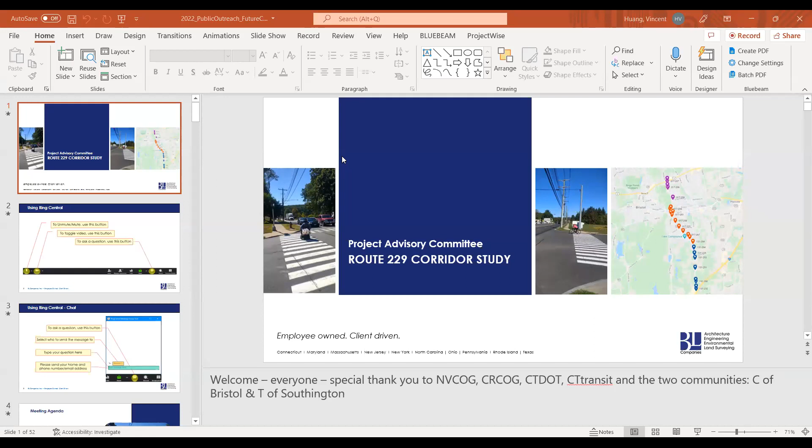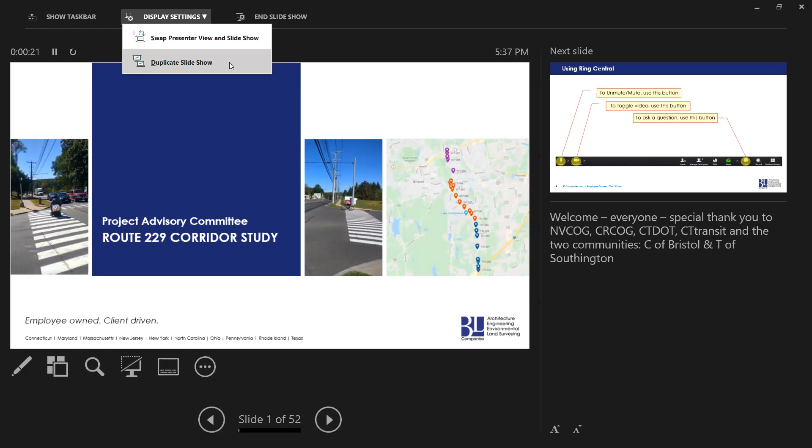Okay. Sorry, screen share wasn't working. That's fine, I can do without comments, so just share my plain old screen. They're probably seeing this instead of that. Oh, screen 2, that's why. You want to duplicate the screen that you have. Duplicate slide view. Why is it empty? It's loading. There we go, we're good. You have the other one, right? Yes. Thank you so much.

Thank you for waiting. We had some technical difficulties, but please note that we are doing this as a hybrid version where we have you in person as well as people online. So everyone gets to listen and view exactly the same presentation at the same time. My apologies, first we had some internet signal issues, and now we're up and running.

For those that are online, please note that you have on the left-hand side a mute and a video button to turn your camera on and off, as well as a chat box where you can communicate with the presenters and ask a question, which will be answered after the presentation. During the presentation, we do mute you so we can have a continuous presentation, but for those of you who are in person, please do stop me at any point and I'll answer your questions. It's easier to do that with individuals here versus online.

And I have Vincent here to assist me if there are any questions necessary to answer right away online, as well as Rich Donovan, who's the project manager from NVCOG, who couldn't be present with us, and he's also answering questions online. And we have Kevin, and Kevin is from NVCOG and will assist us as well.

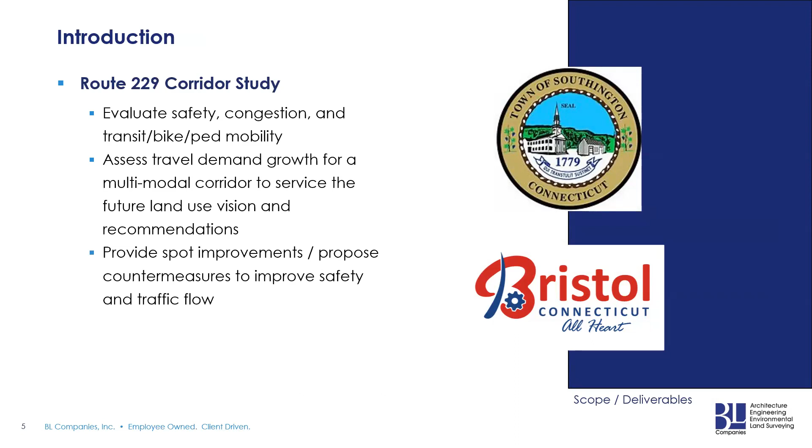So the project itself has been divided into 3 segments, the same way as the presentation. The northern segment stretches from, actually I should have a button, let's see.

Nope, I don't have it.

If you can see my mouse, the project stretches from Farmington Avenue to Broad Street for the northern segment. The central segment stretches between Broad Street and ESPN Drive, or the town line. And the southern segment is from the Southington town line all the way to the I-84 ramps.

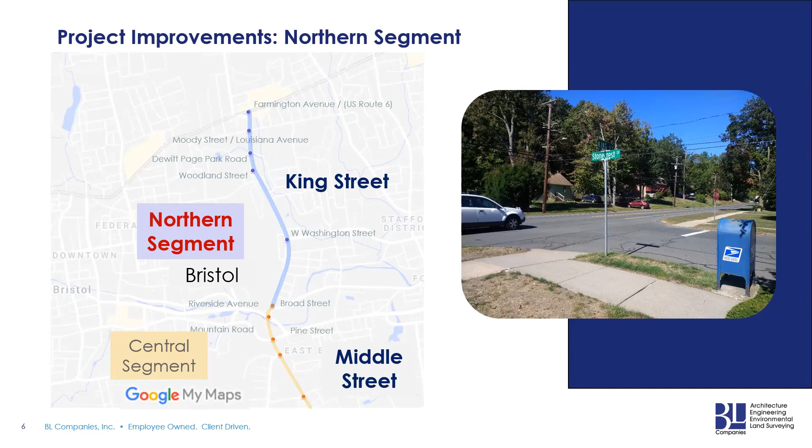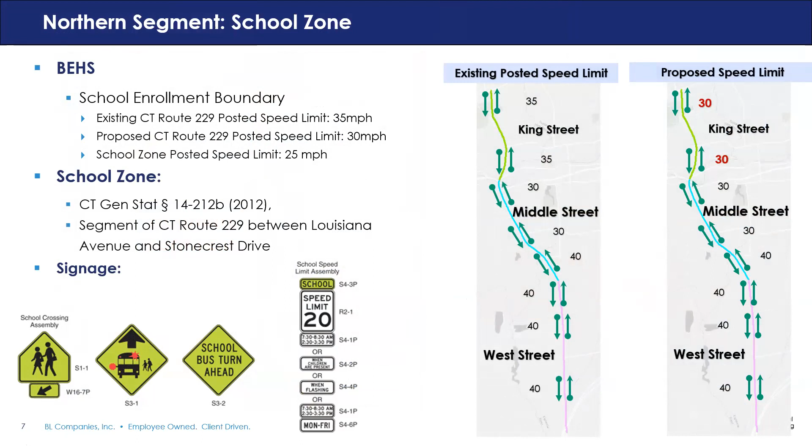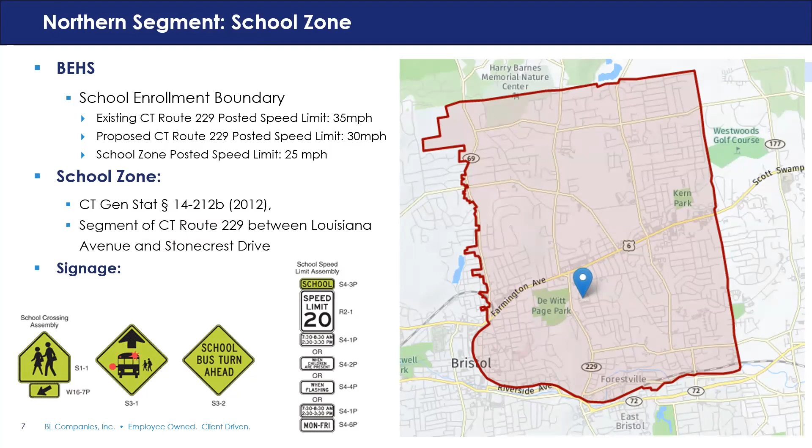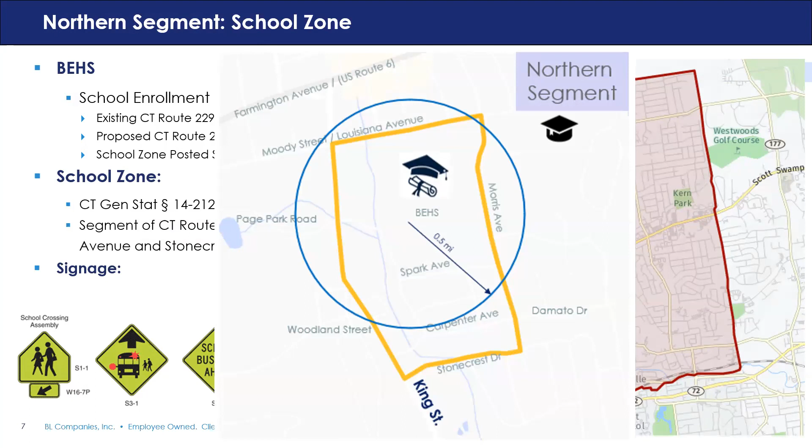Looking at the northern segment, we looked at some safety concerns. One of the locations we identified is where we're proposing a school zone. To your right, you'll see an outline of the enrollment boundary, and what we're proposing is that within a half mile of the school, we define a school zone. That means lowering the posted speed limit from the current 35 to 30, and during school hours to 25 miles per hour.

Overall, we have done renderings for 13 locations. For this presentation, just to make it shorter, I've selected a few locations, but we have printouts of all of them, and I can always pull those out. This is just one of the locations we found to be important.

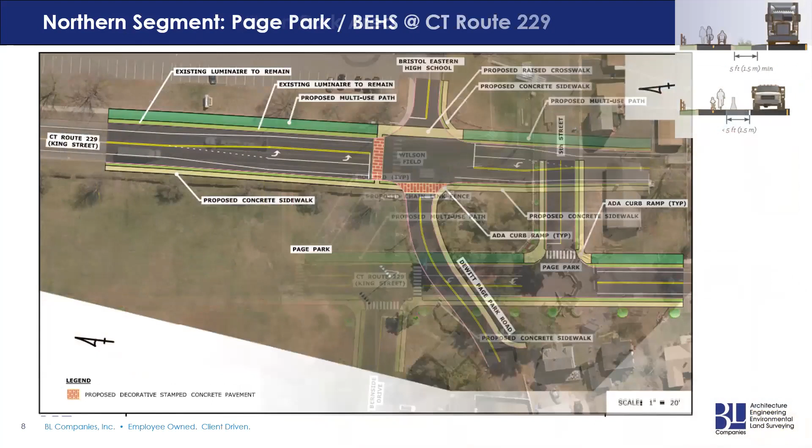How come I can't hide this? Nope, it's not going away. I just don't know why the title isn't... there we go.

Sorry again. So this intersection is with Bristol Eastern High School and Page Park. We felt this location is important as it serves the community and most vulnerable users. Due to high crash rates, such as rear ends and angle side swipes, we're proposing to widen the roadway within the existing curb cut to provide exclusive left turn lanes. We're also proposing a sidewalk on the west side that extends into Page Park - this is the sidewalk, shown as the yellow line. The sidewalk will cross a culvert, which could be a nice structural feature in the park itself. On the other side of the roadway, we're proposing a multi-use trail on the east side, which will connect to the existing and proposed sidewalk along the way.

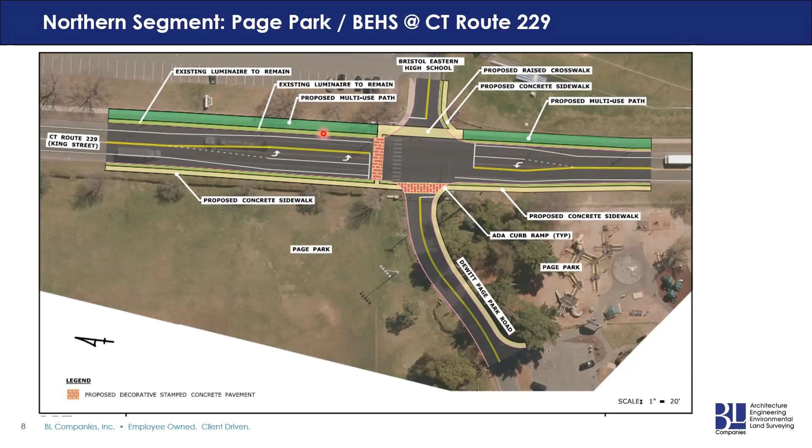Another location we looked at in the northern segment is this particular area, which has a very limited right-of-way for the multi-use path. A few considerations were made in our design process. One was to provide a physical barrier between cars and vulnerable users, narrowing the path from 10 feet wide to 7 feet wide, and providing some sort of barrier. This could be either a jersey barrier or bollards with chain, or some sort of physical delineation between vehicles on the roadway and the multi-use path.

In this area, we're also proposing utilizing rectangular rapid flashing beacons, which are pedestrian-actuated and used to improve safety at uncontrolled marked crosswalks. The device includes two rectangular-shaped yellow indicators, each with an LED array light source that flashes with high frequency when activated. The roadway design for vehicles includes left turn pockets to accommodate the unsignalized side roads.

Question: I see you have one ADA curb ramp, but will they all be? Yes, thank you, because we've had a constituent ask - this is actually the particular reason we selected this slide, this is the only stretch on the northern segment where you don't have a sidewalk; everywhere else you have a sidewalk in some shape or fashion on one side of the road. Can you repeat the question for those online? Sure - will the curb cuts have ADA accessible ramps? So the question was, will the sidewalks have curb cuts for ADA, will they be ADA accessible? And yes, they will be. That's actually going to be one of the slides - we did a summary of all ramps that are ADA compliant and non-compliant, and how many we need to replace throughout the corridor.

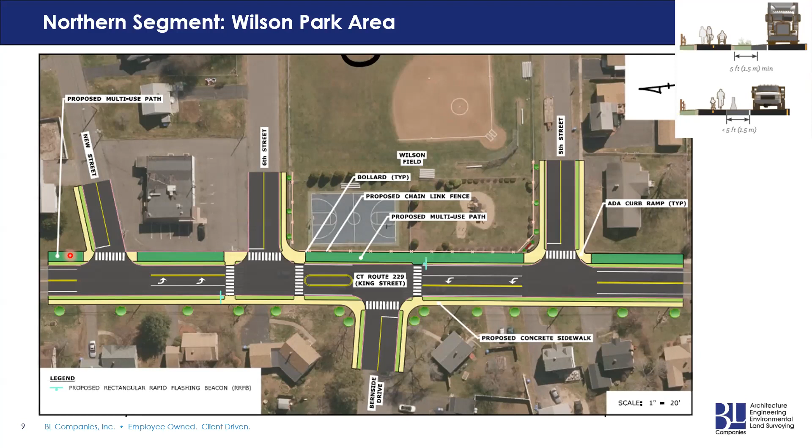We suggest keeping the information to a minimum and at key locations. The sign proposed will be visible by all modes: drivers, pedestrians, as well as cyclists. The information can be branded by the community for the corridor itself, or left unique. Samples of some of the wayfinding or gateway signs are such as ESPN, industrial park. We can design anything for this project or location.

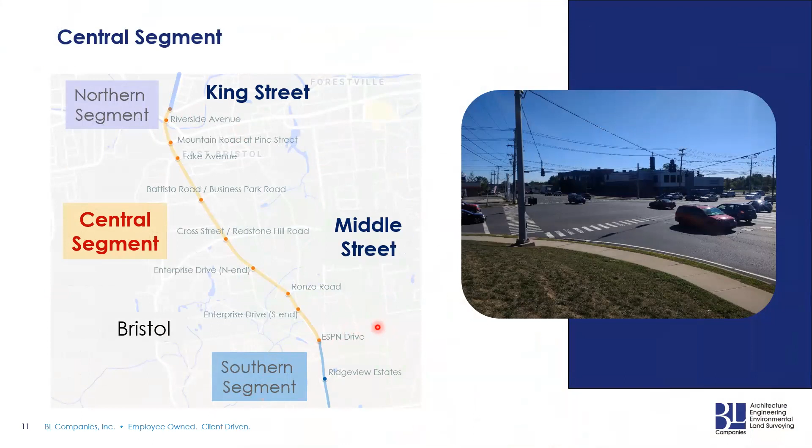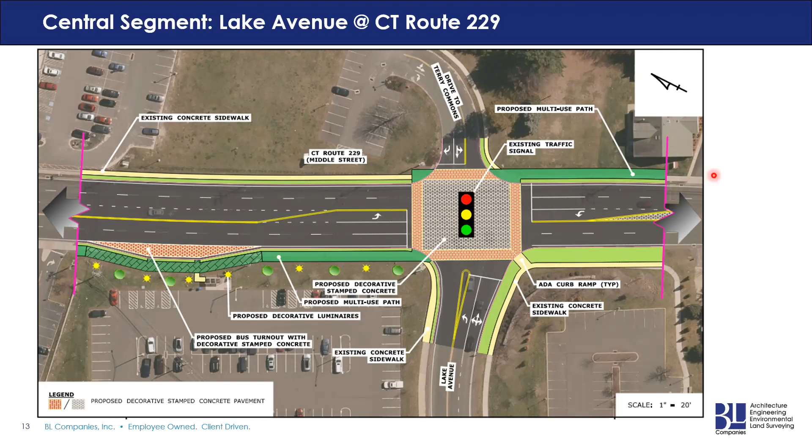The key to the southern segment—again, the southern segment is from ESPN Drive to the I-84 ramps—is that the improvement was to widen the southbound movement to 2 through lanes. That starts just south of ESPN Drive, all the way to I-84, or more specifically to Executive Boulevard North. Additional turn lanes might be provided at locations where warranted due to proposed increased volumes or high growth and proposed developments. And as I mentioned, we're continuing that multi-use trail on the east side and sidewalk on the west side.

There will be a sidewalk. Sidewalk is always provided—here's your north, so west side, east side, yes, sorry.

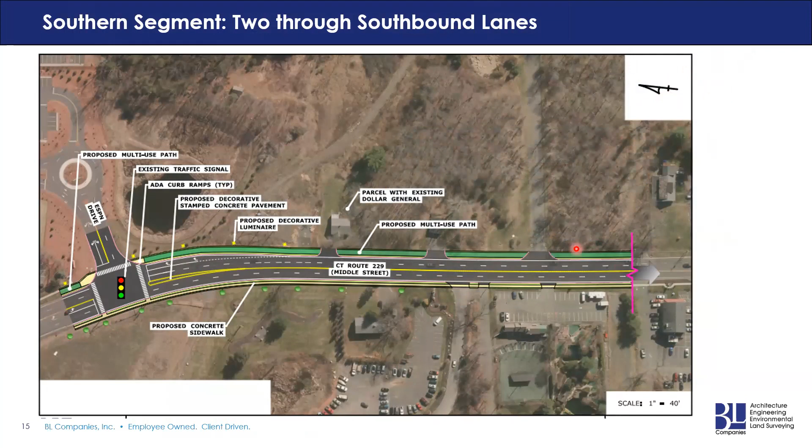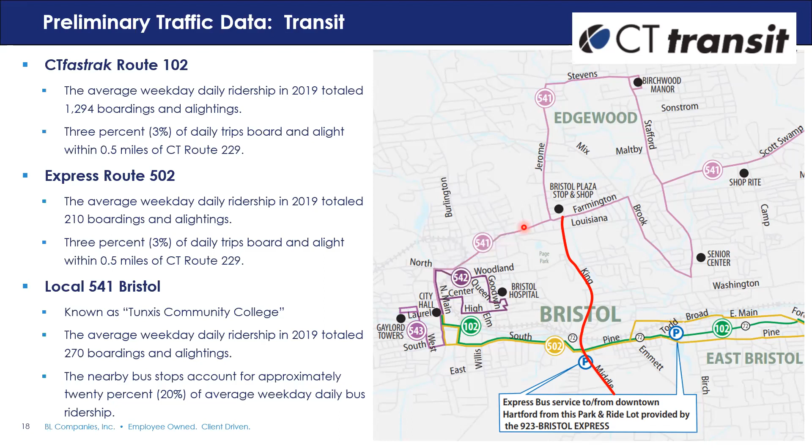Next, let's talk about overall multimodal accommodations, starting with transit. Based on existing conditions, currently there are a few bus routes that bisect our corridor, but none that are traveling in the corridor itself. The bus routes include CTfastrak 102, which travels on Route 72, Express Bus Route 502, which travels pretty much the same way as 102 with fewer stops, and local bus route 541, which travels on Farmington Avenue.

When proposing a new transit route, a transit index need should be created or reviewed. For this particular study, we utilized the 2018 comprehensive transit study done for CRCOG. That study provided us with information on the transit index need, which is based on socioeconomic information, existing public transit availability, ridership stats by stop, access to the stops, walking distance, locations, and so forth.

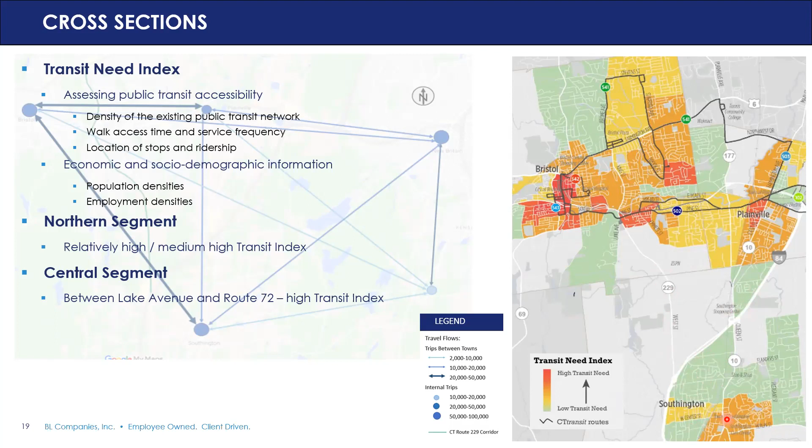So we've discussed and determined that there's a need for a bus route along 229. Similar to the 2018 comprehensive study, we've developed a bus route. We proposed the bus route to utilize the Route 72 extension and Riverside Avenue.

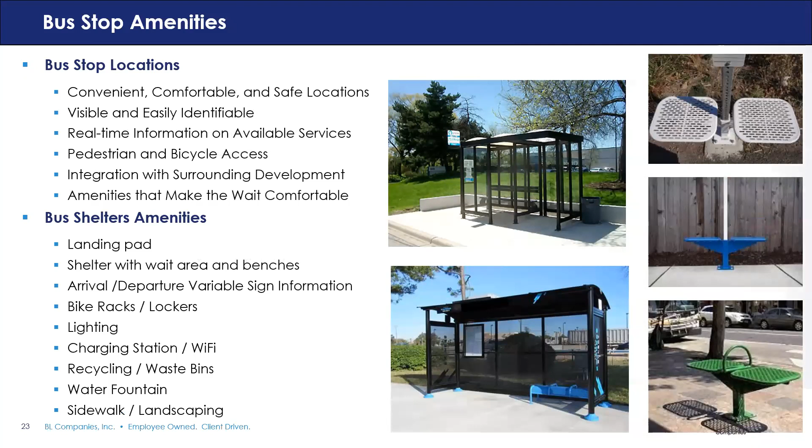Now through the presentation, we've talked about the pedestrian and bike accommodations with continuous sidewalk and the multi-trail. But what we did not talk about enough is that both sidewalks and multi-trail must adhere to ADA and PROWAG compliance. That means we need to ensure that all intersections provide handicap ramps, pedestrian push buttons at all crossings, signalized intersections, and proper crosswalks where necessary.

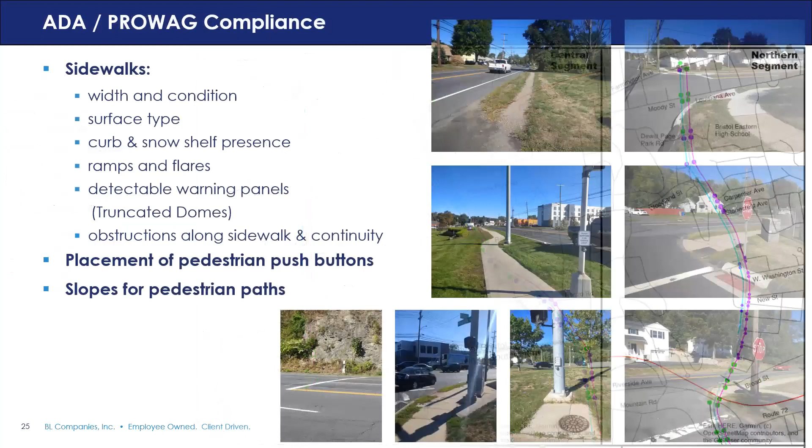And these are just images from the corridor where we're lacking these, or they're not up to standard. So this is just a quick map of proposed multi-use trail, sidewalk where it's lacking, as well as the proposed handicap ramps. It's just quick dots and lines to show an overview of where we would fill those in.

This map provides proposed locations of crosswalks at all intersections, signalized and unsignalized, and the locations where we need to add pedestrian push buttons at signalized intersections.

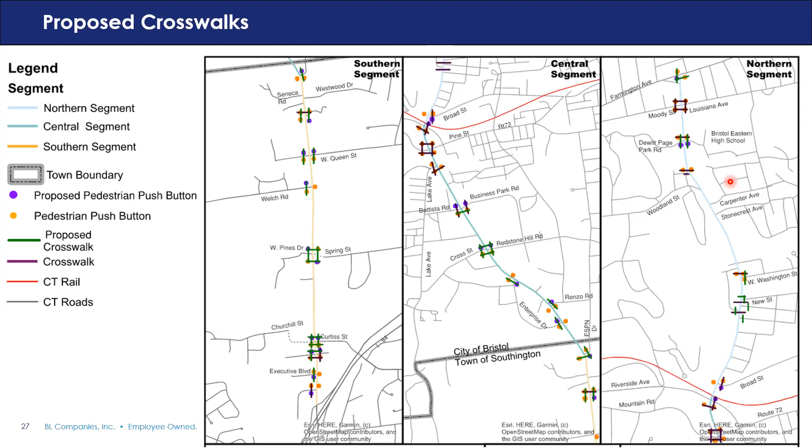So here's a quick summary or statistic table where overall we will need to provide 37 crosswalks that need to be striped, 75 ramps that need to be installed, and 49 crosswalk push buttons at already existing signalized intersections.

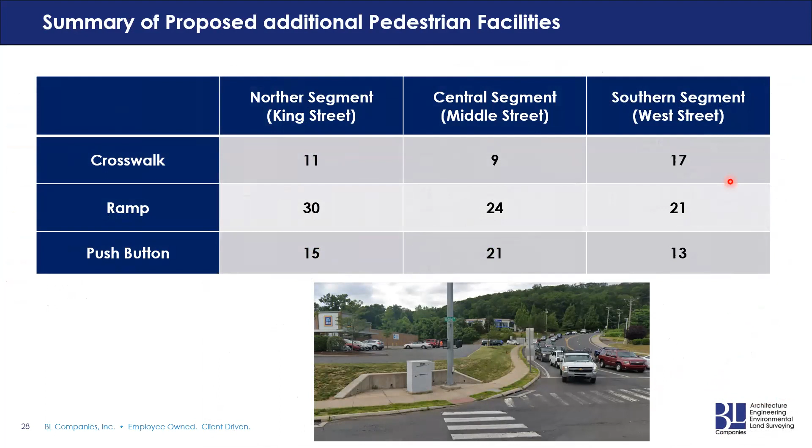So from a traffic operational perspective, we always take a look at a minimum of 3 conditions: existing, no build, and build. For this particular corridor, we actually looked at 4 conditions. Existing conditions are what the roadway performs at now. No build conditions, we're looking ahead, in this instance 20 years ahead, and what would the road conditions look like without any type of improvements, just generic growth in the corridor 20 years from now.

Build conditions represent where you add on some proposed development. Let's say there's additional housing built, or additional stores being built, or another Amazon warehouse or something along those lines. We need to account for that traffic in the corridor. So that's build condition—again, no improvements to the roadway.

And then the last piece would be: okay, you're adding on all this development, what happens to your roadway? Is it congested? Are there any type of improvements that are needed? That's what build with improved conditions means—either geometry improvements, signal timing improvements, all of the above, or widening the roadway, whatever needs to be done.

And the improvements that we considered, or analyzed using Synchro analysis, were exactly the same as the renderings. So wherever we proposed a left turn lane bay, we included that in—nothing more than what we've rendered or suggested. Going back to the software that we've used, it utilizes a quick grading system which we're all familiar with: A means good, F means congested.

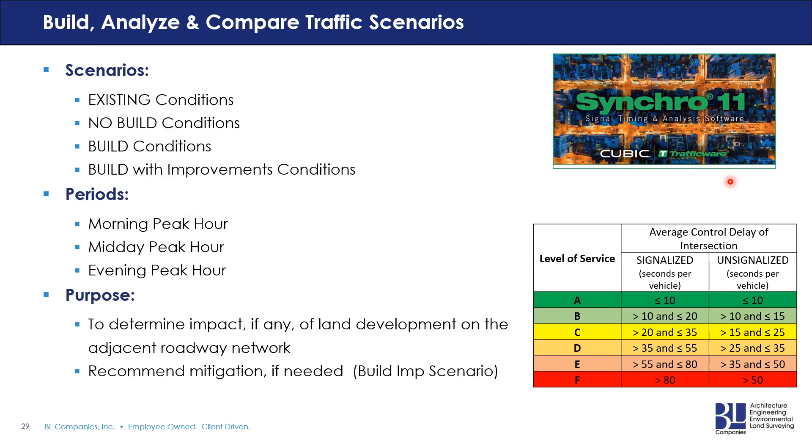If we continue 20 years down from now with just growth, that has not changed or does not improve. With proposed roadway and proposed developments along the corridor, again, the condition does not improve.

Yes, you used 2 words to describe pedestrian phase. What are those? So currently, when you push a pedestrian push button, the entire intersection turns red for vehicles, and the pedestrian can cross whichever way they want, right?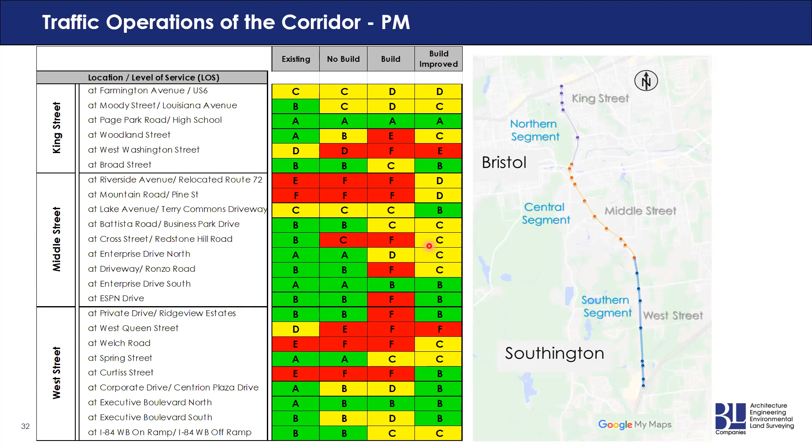In the proposal, can they widen it? So the question is, can we widen the southbound lane? And that's what we're proposing. The question becomes the right-of-way—is there enough right-of-way for that, and what would be the cost to do that? Because not only are you widening the road, but you're also relocating utilities and probably signal mast and retiming everything. So yeah, it's a cost benefit, which we've provided in the report as well.

So those are the slides that I had presented, a summary of renderings that we have. We are starting today, and we'll be in the 30-day comment period. That means your comments from today's meeting and anything you tell us today, we'll have to incorporate into our design concept or at least answer. We do encourage you to provide us with your comments and concerns. We'll incorporate them and finalize our findings so we can present it to the town and Connecticut DOT once more. So thank you. Any comments, questions, or concerns?

You talked about the phases, and you said the last phase was the West Street phase. Was that for the bus route, or are you still going to build out West Street? No, that was just the bus route. So the question was about the three phases we've discussed, and it was just the new bus route we're proposing along 229. Let me pull that out. I was really concerned about the people and the bike trail in Southington, and if we're not building out that section, how do they connect?

Okay, but I have a question on the bus route too. Go ahead. So this is the bus route—this is the phase one piece, that's our stretch of the corridor. So the first phase stops short.

What's small to see, but one of the things that was important is in that little lower gap, the lower portion down, right there is the adult ed center, and so making sure the bus route accommodates the adult education. I'm not quite sure—I think it's not on that road because that's on Emmett. It is on Emmett. Right, and we're proposing to travel on Emmett on the way back. Okay, so that doesn't look like Emmett. Yeah, but you have to go to the adult center in both directions. Right, otherwise how do people get there?

Go ahead. So an issue I used to have to deal with is I used to live on Shawn Drive, and the bus only came in one direction. So it would basically come once every two hours, even though the bus actually went around the city every hour. So the concern is that the bus route should travel the same path as it comes in and comes back—northbound and southbound should be on the corridor, but you would prefer it to be on Emmett versus 229.

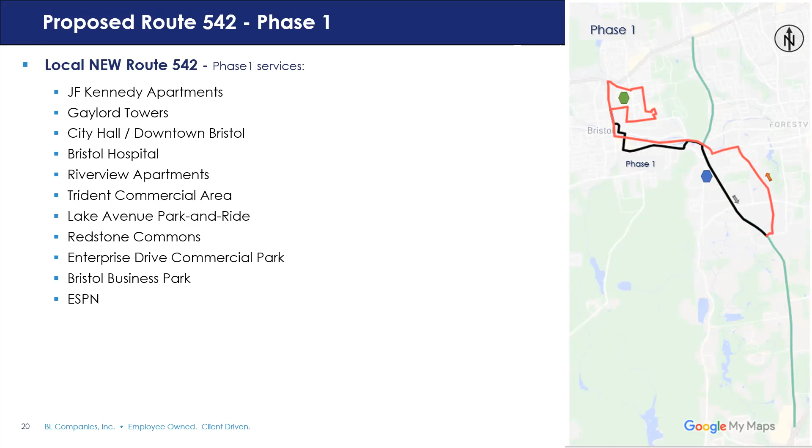So it is looping all the way by 84 ramps in that commercial district, but not in the hot spots in Bristol where I think a lot of us are feeling there might be a heavy need. So you would rather have it looping somewhere here, which is right about where Enterprise Drive is, right? In addition. You've got to hit the adult ed in both directions. People can't get there if it only goes in one direction.

Does it go to the senior center in Bristol? Yeah, they have their own bus. They could get there, but they'd have to wait till it went all the way down and looped around and came back up again. Nobody's gonna do that. No.

Now, are you also proposing that the bike only travel on those multi-trails? Yes, at least on the 229 stretch, yes. And how are you gonna enforce that? That's a good question. There is no real way of enforcing it aside from signing and making it safer for them to travel on the multi-trail versus the road. But you're gonna make it wide enough so people can walk and ride? Yes, 10 foot wide. What is a multi-trail? What does it look like?

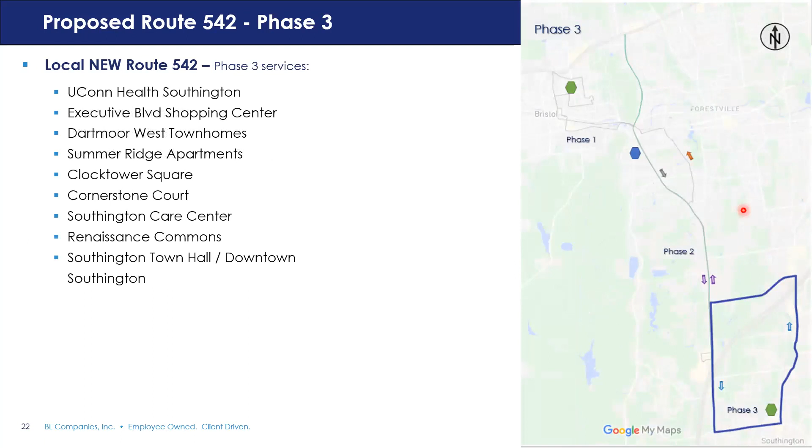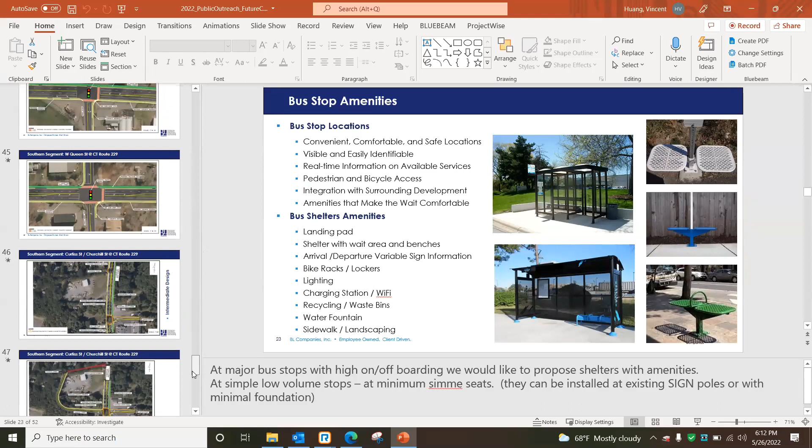So we do have, actually, let me stop the presentation. We took out that slide, but I think since there's a question. So a multi-use path basically is a paved wide roadway that is 10 foot wide. And there's a separation of about 5 feet from the road, and then you have vehicular traffic. So a multi-use path is about 10 foot wide. It's a paved roadway.

One more question about the bus. Do you have a proposal for how often you'd like it to run? No, we do not have that detail. That's something that we would have to work out. So the question was, do we have the frequency as well as the finalized bus route for the proposed bus route? And we do not have that detail.

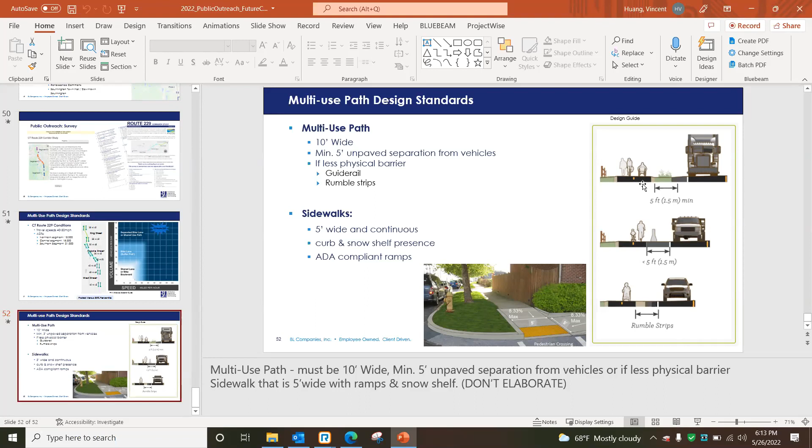Do you have in the plan what you plan to do at the corner of Woodland Street and King Street? Yes. One of the worst intersections. It's in the binder, actually.

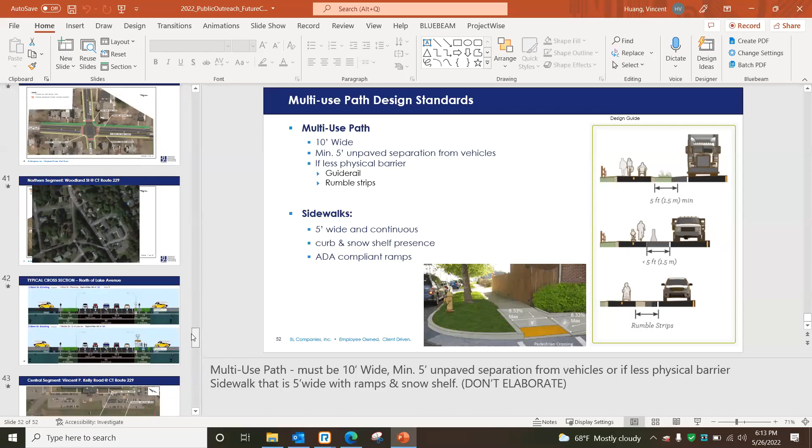No, it's loading. The sidewalk, there's no sidewalk on the side of Page Park in that area, all the way down.

There it is, we see it now. Yeah, but you see something else on my screen, which is the notes. So we gotta duplicate it, huh? Yeah, so duplicate. This is what duplication is, right? Hold on a sec. Duplicate. Presenter view. Is there gonna be a light there? Let's see. It's thinking. There we go. All right. So just so we're all on the same page.

I have to leave for another meeting, so can I get my questions to Ray? Sure, yes. You can email us directly as well, through the NVCOG website. So the question is if you can contact us directly or through Ray. Yes, you can contact us directly through the NVCOG website, nvcog.org, the project website, or Ray can provide our contact information as well. She's also a Board of Public Works member. So yes, you can definitely contact us. Okay, because just about all that is in my district too. Most definitely. So the constituents tell me their needs, but I have to run for another meeting. Sure. Thank you for coming.

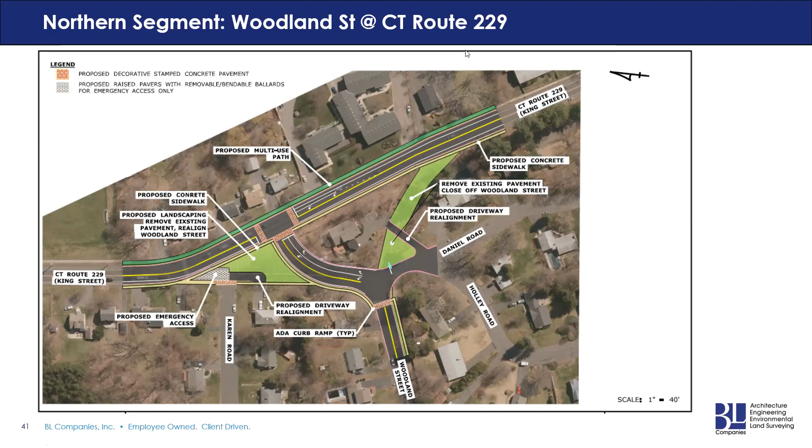Any other questions or comments? Anything online? Now, is this a... Yes, said this is a proposal. The proposal goes to whom? Kevin, do you want me to answer this, or do you want to take? Can you repeat the question? Yeah, if this is a proposal, and it's completed, goes to what entity? So the question is, this is a proposal, this is the planning study, where does it go next?

So the proposal or the planning study has been done for NVCOG, which is your regional agency. And what they do with the planning study, then they start looking for local or state and federal funding to actually implement those studies. So they either take everything, or let's say they'll take the transit piece and they'll find appropriate funding for transit and then implement it in cooperation with Connecticut DOT and the local agencies, the city of Bristol and town of Southington.

Another piece, again, sidewalks, they could get a particular funding for that and they will just go and rebuild sidewalks or multi-use trail. So the planning purpose is this is a corridor in need. It does experience congestion. There's some safety issues or safety concerns. So what can we do to make it improved? Once you have a study and you have identified problem areas, then you can start applying for federal funds and state funds to have it designed and built. Next question.

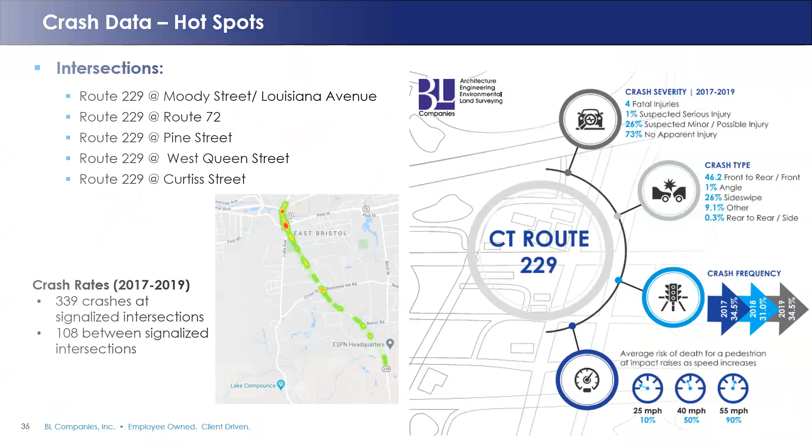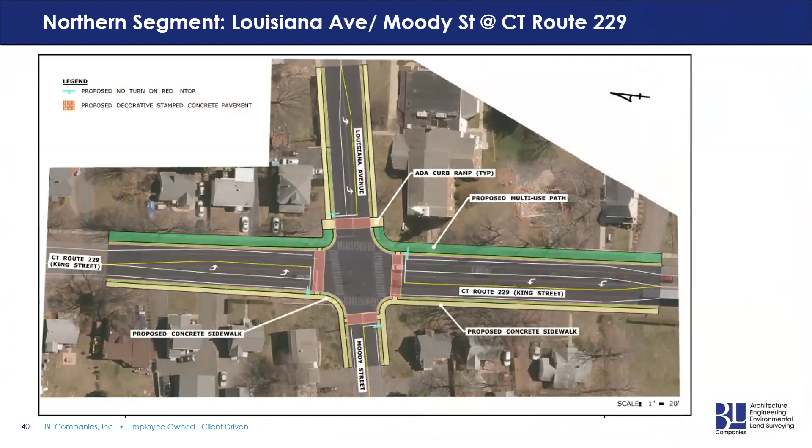So let's share screen. Share. You want to do presenter mode? Yeah, that's fine. All right, and I will duplicate. We gotta do this all the time. All right, it's okay. Which slide was it? Go up. No, let's go down then. They're not in order, because those are the extras. Keep going. This one, right? Churchill, yep. That's the one. And they can hear you. Chat, where's the chat? I can't see the chat. This is only question and answer, but it's not the actual chat function. That's why it's a second person on the second laptop. Oh, I see. Are you able to hear me?

So there was a question online asking with regards to the southern segment, more specifically the intersection of Curtiss Street, which is this, as well as Churchill Street. Now, for those of you that don't know, Churchill Street has a large residential development proposed off of Churchill Street. And some of the concerns that people have is taking a left out of Churchill Street into 229.

So we looked at it from the traffic operational perspective, and currently, and even in the future, there's not enough traffic to warrant a signal for that particular intersection. However, what you can do is you can tie it into an existing signalized intersection. So in cooperation with the town, we looked at some concepts, and this was one of the proposed concepts. Oh, page down.

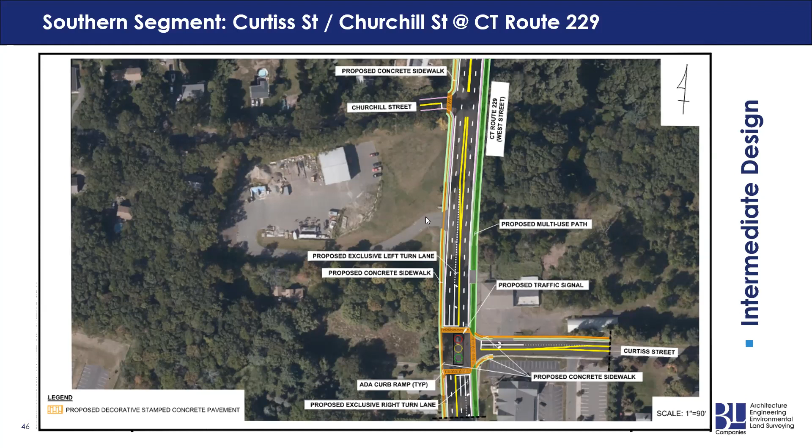There we go. We're proposing to realign Churchill Street to tie in and create a four-legged intersection. Again, we're still maintaining multi-use trail on the right-hand side, sidewalks on the left. By tying in this way, again, it's an existing signal, so we're just providing means for safe access from Churchill Street.

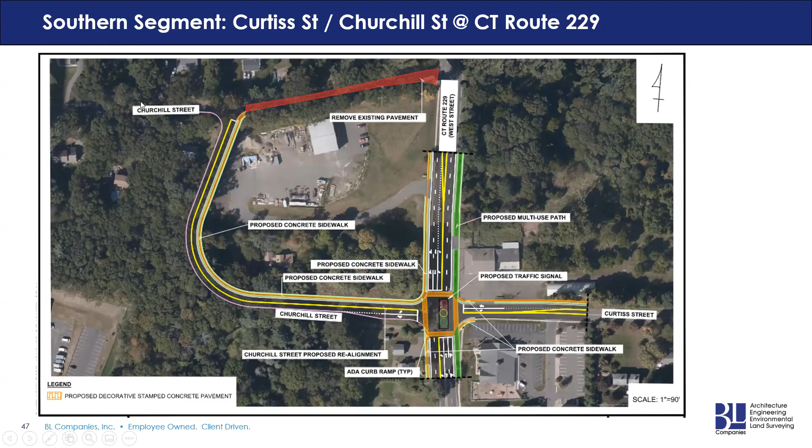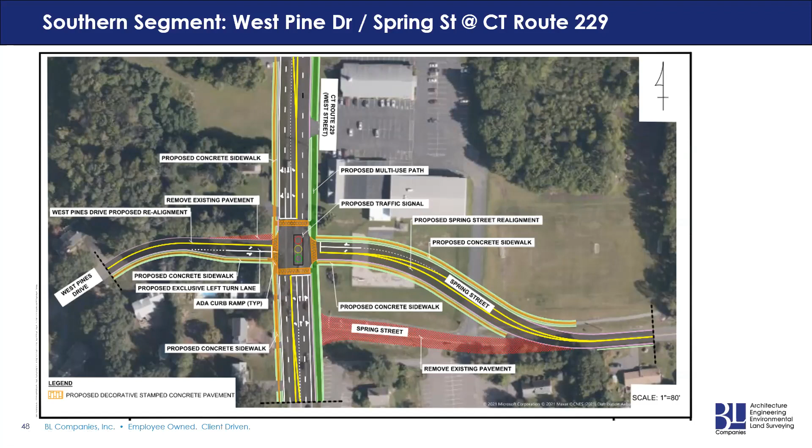Yes, Vincent? I don't know. Oh, we have some questions in here. Yep.

Has the total cost of the project been calculated and estimated? Yes, actually, we have some rough costs and they're presented in the final report. We've done estimates for individual signal designs, realignments. We've done some linear footage on how much it costs to do a sidewalk or the multi-use path. Those estimates do not include any acquisitions needed for right-of-way, that would be additional cost, but the linear and square footage costs for those improvements have been estimated and provided by segment and type in the report.

And we also have prioritized them into moderate, easy, or complex design, and therefore relocation or redesign of a signal like this or approaches would take probably two construction seasons, or at least a substantial amount of time to design and build, versus providing a sidewalk or making changes to ramps and having them ADA compliant. Those are easy and could be done within one season.

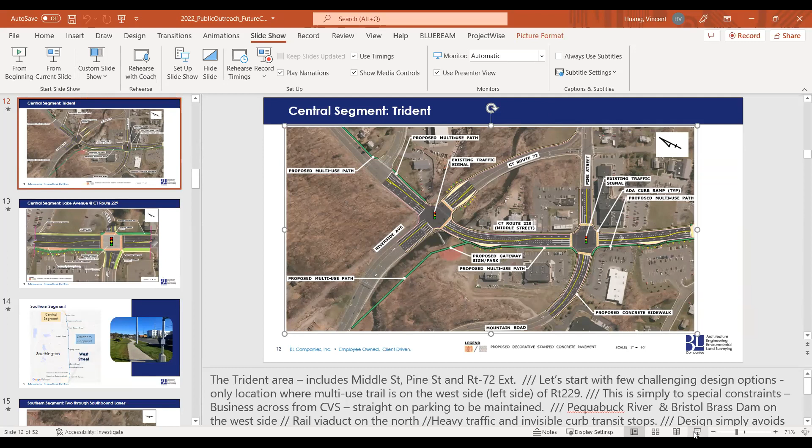Okay. Right? I hope. What do you think? So, Mountain Road and Middle Street. Okay, so close this, right? Well, yeah, so that they can see the slide. Because right now they can see the... Okay. Yep. All right, but can we present again? Yep. Okay. Every time. Every time, that's okay. It's a good thing I didn't put anything crazy in my notes.

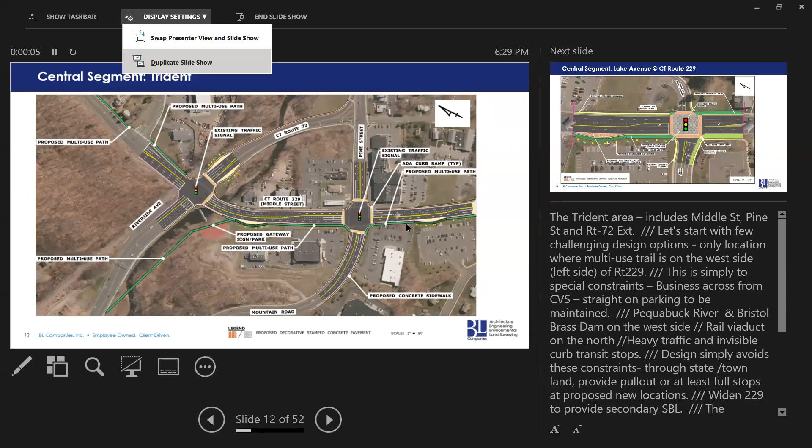All right, so the question is with regards to crossing the roadway. So let's go back to the concept itself. The concern is with Mountain Road and Middle Street, as well as Riverside Avenue. So our bike path or multi-use path is actually on Riverside Avenue, not Mountain Road. And we're utilizing this nice area by the river. And then this particular segment, because of the high volumes, the high crash rates, we're actually continuing it all the way to Lake Avenue. So we're not crossing here, although we're providing safe crosswalks.

We're not crossing, we're directing the cyclist to continue on this cycle track or multi-use trail on the left-hand side. We do pick up the trail to the north of Route 72 on the right-hand side. And again, we're just providing our crosswalk with pedestrian push buttons. We cannot provide any other means of crossing but that.